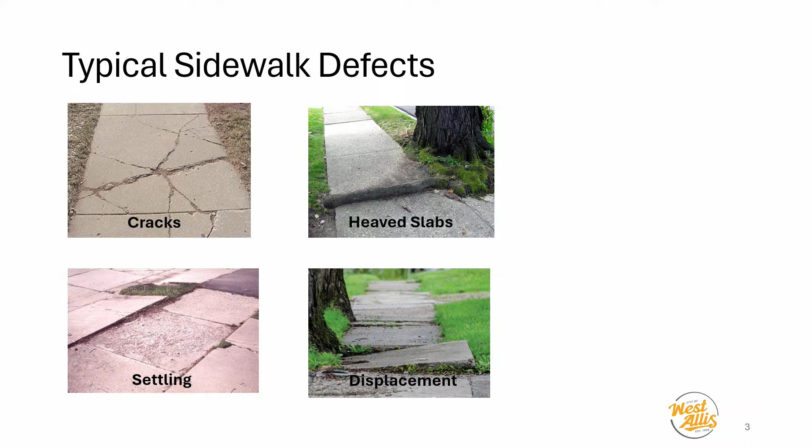So what we do when we run a sidewalk program is remove the slabs that have been determined not to be in compliance with our standards. We walk the entire area that we are doing the sidewalk program in.

This year, we're doing the area bounded by South 108th Street to the West City limits, and then the South City limits to the Union Pacific Railroad tracks. And we've walked all of that.

We found all the sidewalk in disrepair, and we remove those, then go through and take the old slabs out. They put forms in, which are sometimes metal, sometimes wood, but they're the 5-foot width that's appropriate.

They pour concrete in there, finish it off, and then we have to secure it for about 10 days so it cures and has time to get hard and set properly. Then we'll open it back up for foot traffic, and come back and repair the sod alongside each side of the sidewalk.

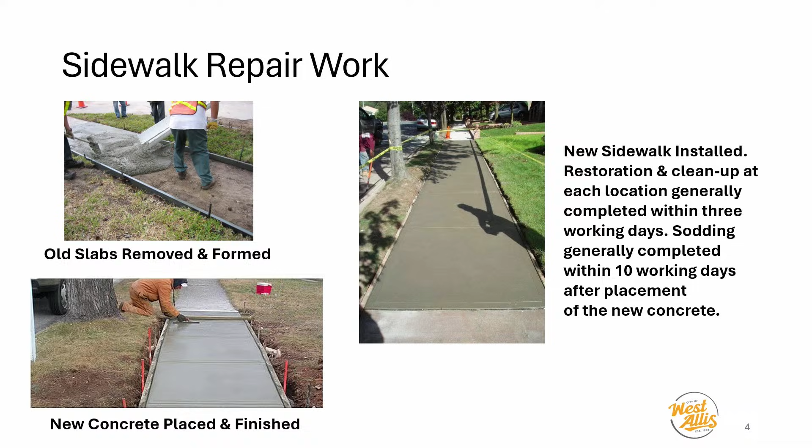Again, the limits of this year's project are in this area on the west side of town. We do inspect the sidewalks, going around the city every 10 to 15 years.

We try to do a complete loop, and then depending on available funding, we try to do those repairs in that 15 to 20 year cycle.

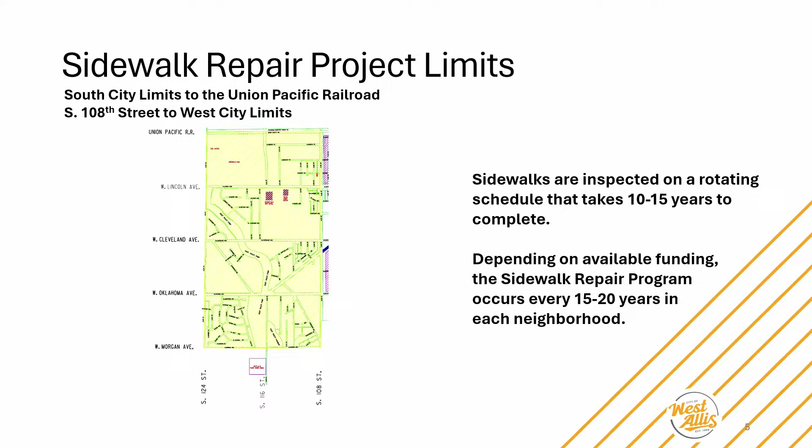The reason we do this is because there are hazards when you have broken, raised, or settled concrete. It's a danger to pedestrians and makes ADA accessibility difficult. By replacing these and making sure they're in good condition, everybody benefits.

Property owners benefit because it makes it easier to shovel. ADA users and pedestrians in general have an easier time getting through. There are approximately 1,400 properties that we inspected this year, and about 202 of those needed sidewalk repairs.

We're estimating that the project costs approximately $300,000. The last time that we were in this area was 2007.

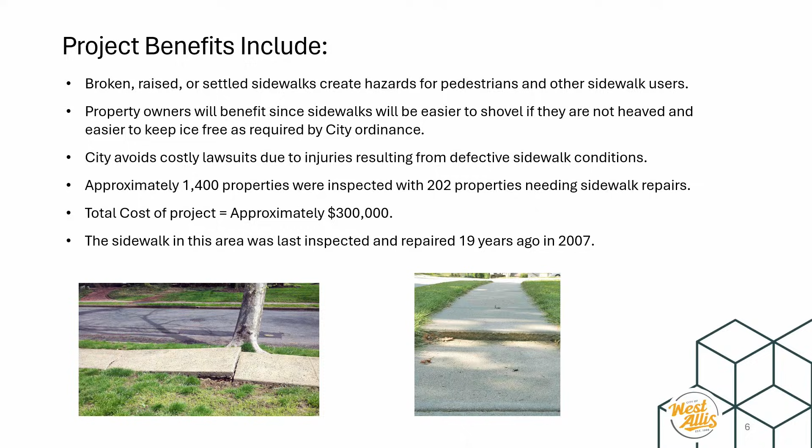As is city policy, every property that is improved has a special assessment. We sent an estimate of the assessment to every property that's going to have work done. The final bill won't come until after March of 2027, because we need to collect all the costs and make sure we have all the measurements done, so we can provide an accurate final cost to each property owner.

It will not be more than what we've sent out, though. That is the max, unless we would have a new public hearing or have a property owner sign a waiver to increase their cost. So what we've sent out is the max.

We have a couple different payment options that the city offers. The first is a lump sum payment if it's under $100, a 5-year installment plan if it's between $100 and $250, and a 10-year installment plan for any amount over $250.

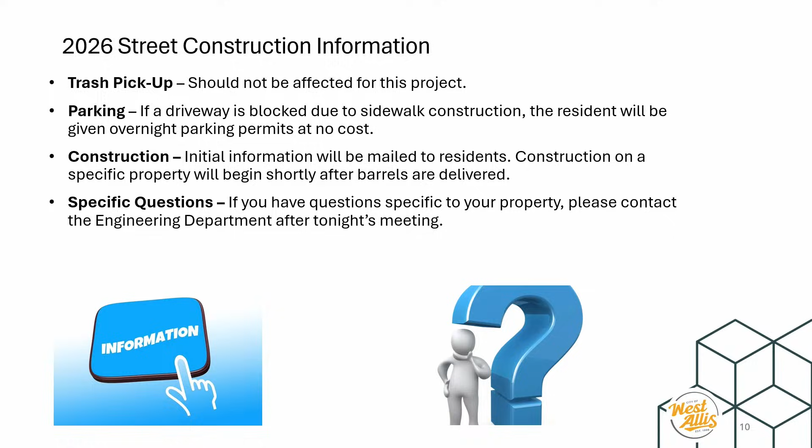To reiterate, if you have something specific about your property, please reach out to the engineering department after this meeting. If you have general questions about how special assessments work or about the project, we can certainly talk about them tonight. And with that, I conclude my presentation.

Thank you, Melinda. Do any alderpersons have questions or comments for the city engineer? Mr. President. Alderman Weigel: Melinda, could you go back to that assessment rate?

Yeah, this one? So I'm looking at a copy of an estimate sent out to a resident, and it's showing 5 feet of concrete walk — 5 linear feet, so I assume that's 1 square, right? Yes. But it says the rate is $39.98, and then the gross comes out to be $199, and then it says a 50% discount. It seems like it's not jibing with the process. So, there are two different ways we can assess this.

One is per square foot and one is by linear foot, and the $39.98 is the linear foot price. We should have included the square foot price in this presentation, and I apologize for that.

There's a minor difference here of a couple bucks, because this estimate says $99, but the process here says $97.75. If you give me that specific address after the meeting, I can certainly take a look. Not that it's a big thing, it just seems different from what I understood it was going to be. Completely understand. Okay, thank you.

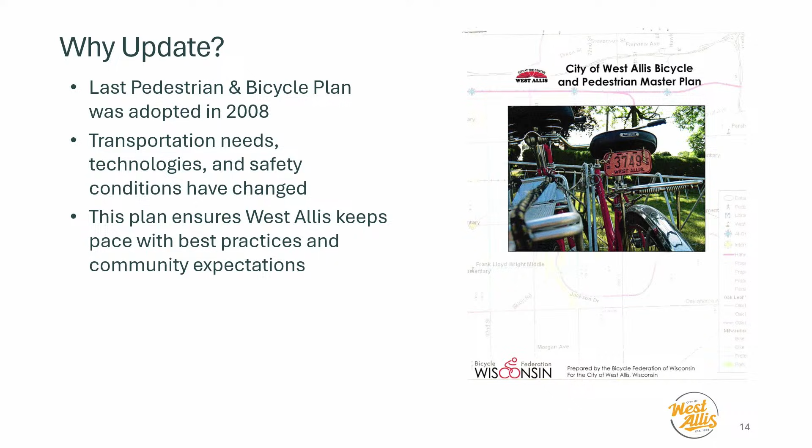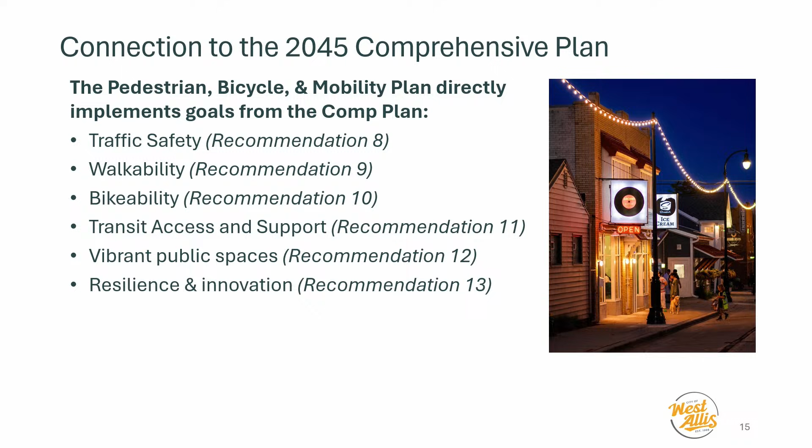This is directly tied to the 2045 comprehensive plan. The specific transportation goals include traffic safety, walkability, bikeability, transit access and support, vibrant public spaces, and resilience and innovation. These goals directly shaped the existing plan.

Essentially, this plan is a resource to help guide the city forward. We're looking at enhancing safety for people driving, walking, biking, or using mobility devices.

Additionally, we want to understand where walking and biking connections may be incomplete and can be improved, while focusing on other methods of transit, including public transit, and its ability to positively impact jobs and business growth.

We're also looking at prioritizing investments using objective data along with existing project schedules, and supporting economic development with clear coordinated mobility guidance.

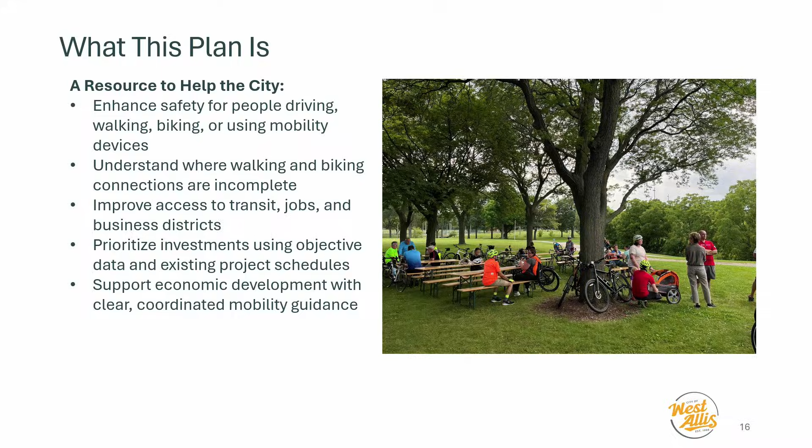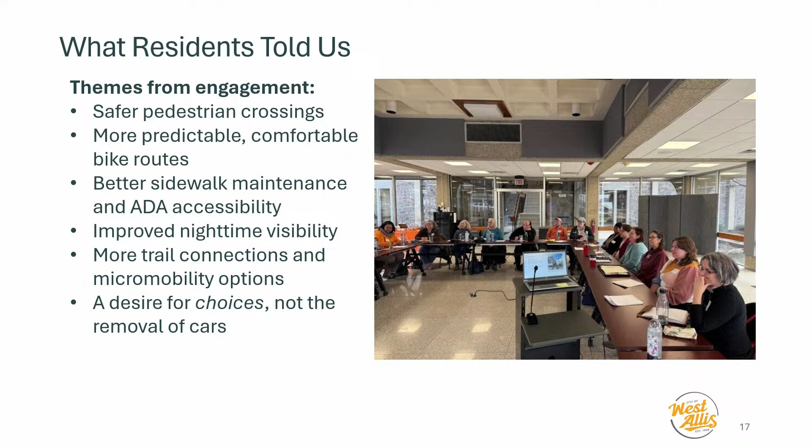Through our engagement sessions, residents told us a variety of themes: safer pedestrian crossings, more predictable and comfortable bike routes, better sidewalk maintenance and ADA accessibility, improved nighttime visibility, trail connections and micro-mobility options, along with a desire for choices, not the sole removal of cars.

Right now, we're going to look through the existing conditions. This will help show us our existing networks, our gaps, and the opportunities that will help future improvements.

The street network that every resident interacts with daily shows a full network across local, county, and state jurisdictions. Because so many partners share these corridors, having a coordinated plan helps us make strategic decisions and align with reconstruction projects and support development when opportunities arise related to street construction and other development scenarios.

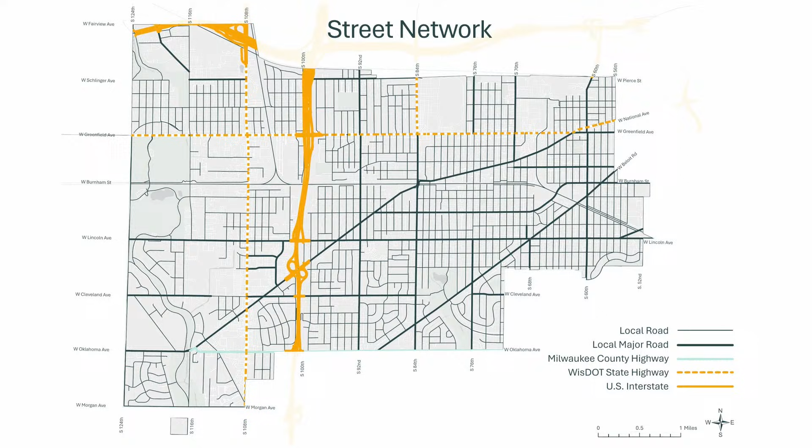The next map shows where sidewalks exist today and where gaps remain. Gaps are shown in red, while sidewalks are shown in light blue. It helps illustrate how people move throughout different parts of the city and where connections are stronger or weaker. Sidewalk additions can depend on a variety of factors, including context, opportunities, and policy direction, which the city and Common Council evaluate over time.

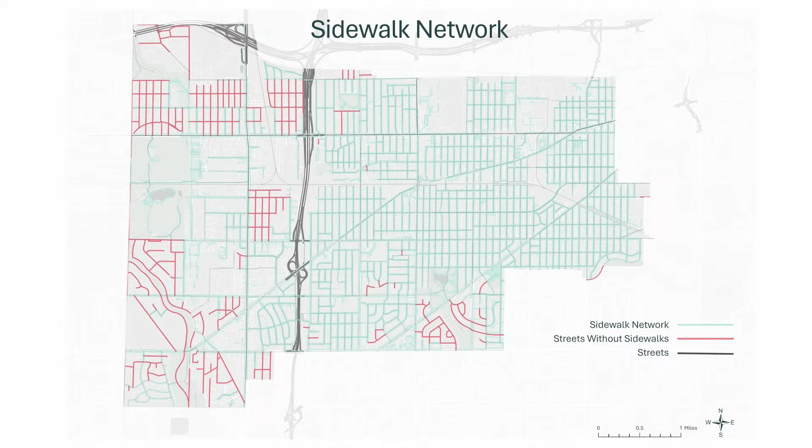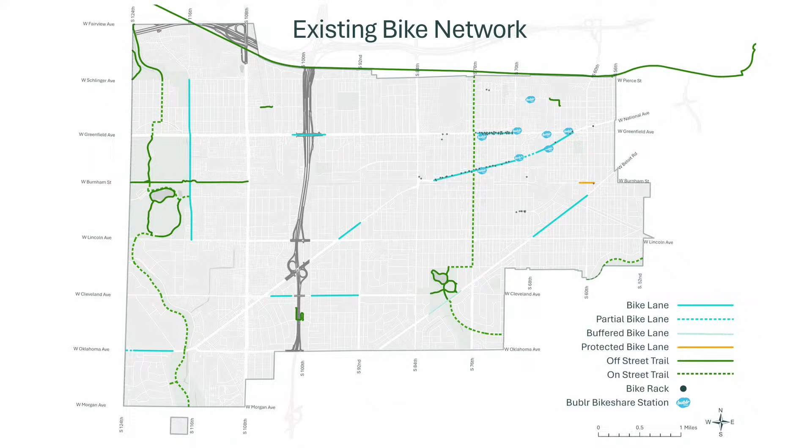Shown here is the existing bike network. It shows a mix of lanes, trails, and shared routes, along with Bublr stations and bike rack locations. While we do have strong assets already in the community, several areas remain disconnected from each other. Strengthening the network would improve recreation, commuting options, safety, and visibility for businesses and residents alike.

The future bike network shown here was a long-term vision adopted within the 2045 comprehensive plan. This network is a clearer, more connected system, including additional bike lanes, more infrastructure options, along with our neighborhood greenway network, shown in light green. That's a variety of slow, comfortable streets with traffic calming and other features that will allow for biking and pedestrian activity along neighborhood streets.

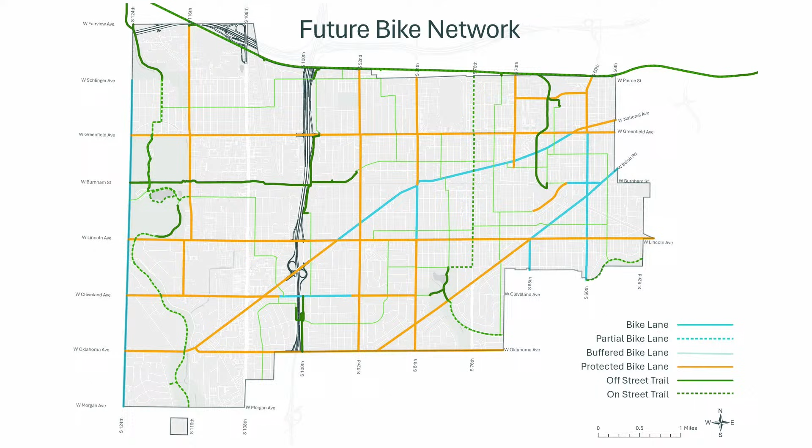The next mode of travel people use within West Allis shows the existing bus routes. Transit is not provided by West Allis, rather it's through MCTS, as most people know. However, we do shape the infrastructure that supports it, including sidewalks, crossings, lighting, and bike connections. Improving these elements makes the entire system more reliable and accessible.

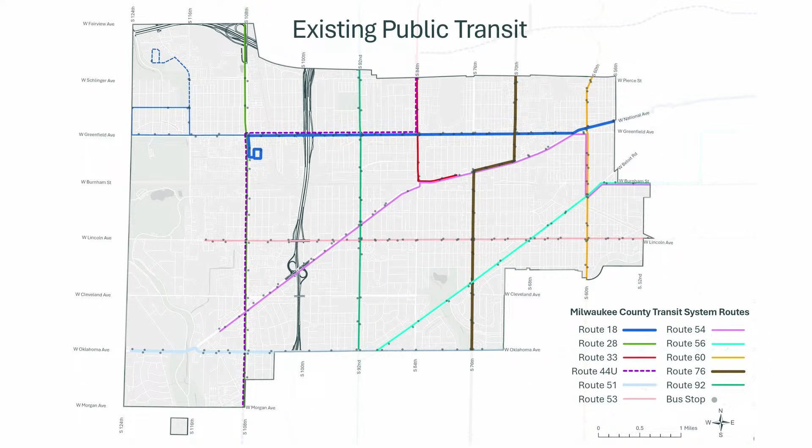This included reducing parking requirements and increasing housing flexibility, including duplexes by right in certain zoning districts. We've already seen a few duplexes come about without complaint or issues.

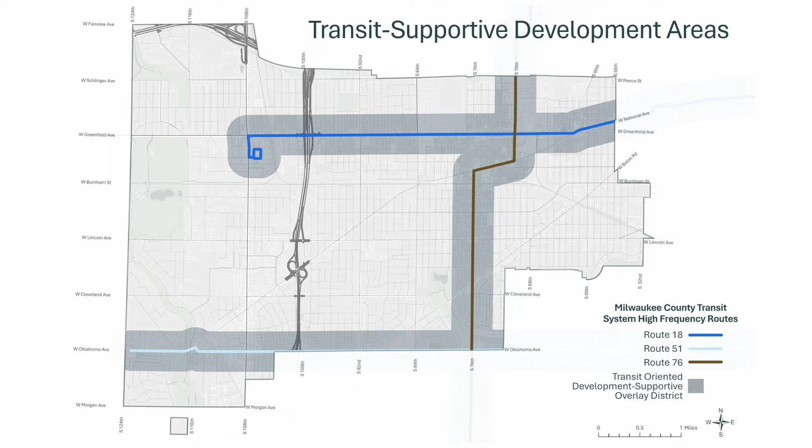A transit supportive overlay would further this by building on the success, offering modest additional flexibility in these well-connected areas. Over time, this kind of incremental infill may help support local businesses and gradually strengthen the city's tax base.

The next section of the plan calls out the goals and objectives. This plan includes clear, measurable objectives for safety, connectivity, infrastructure upgrades, innovation, and education. These metrics will help departments work towards shared goals and improve our competitiveness for state and federal funding.

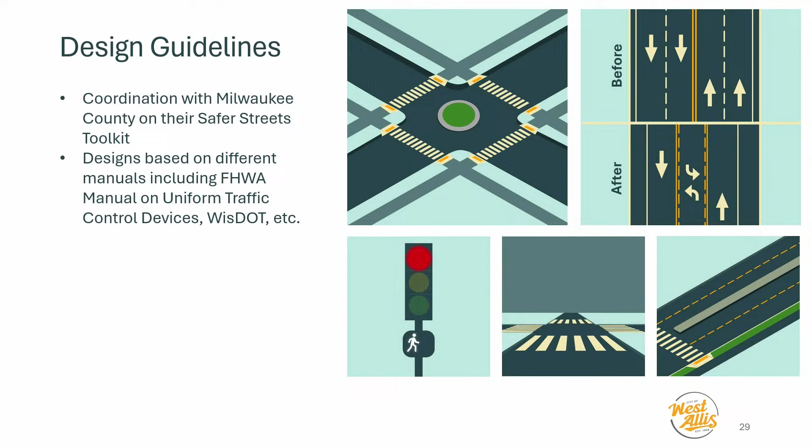Thank you. If you have any questions, please let us know.

Thanks for the presentation. Are there any questions from the council? Mayor Devine? Alderwoman Grisham? Thank you.

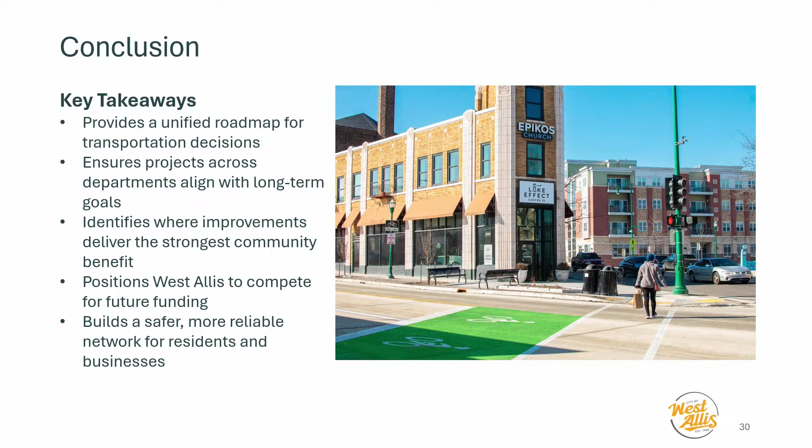Jack, out of bounds—I'm calling on that 2008 comment, by the way. Way out of bounds, buddy. Yeah, that's a boo. Anyhow, thank you for the presentation.

I want to back up to a few years ago when we discussed sidewalks. I want to highlight the areas on the pedestrian network, page 32, that showed the west end of the city with a significant amount of non-connecting sidewalks. What we discovered when I was a representative of that district is that the people who live there did not want them—they were adamantly opposed. As explained prior, engineering said those sidewalks would be placed if the majority of people on those blocks wanted them. Is that the type of approach we're including in this plan, or are we just going to connect all the streets because that was one of the goals for the entire city to be connected with sidewalks?

Thank you—we certainly do have a goal for sidewalks across the city, as they increase safety. However, these can be taken on a case-by-case basis as the council desires. Certain situations may call for different options, such as traffic calming rather than sidewalks, so we appreciate feedback from residents, but it is on a case-by-case basis with the overall goal of having sidewalks. So, to be clear, it will depend on whether those residents and taxpayers actually want those sidewalks.

I'll use Mr. Roush and Mr. Radcliffe, who presented about the sidewalk replacement, as an example. One may have it across the street and the other doesn't, and they really don't want to look at repairing sidewalks. That's why they purchased their homes in that area, for more of a rural feel versus urban. So I just want to be clear on that, whether I would vote yes or no based on those residents that I represented and still have in mind.